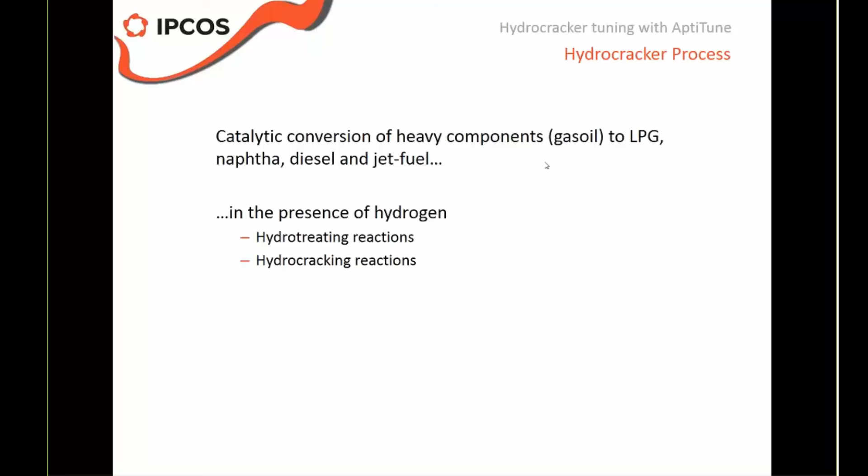So, as I promised, let's have a look first at the process itself. A hydrocracker is actually a catalytic conversion of different heavy components. Typically, the feed will be a gas oil type of feed coming from either the vacuum unit in the refinery, or could even be gas oil from the atmospheric unit. And those components will be cracked to lighter components, including LPG, naphthas, diesels, and jet fuel. And this conversion is done in the presence of hydrogen, and that means we'll have 2 types of reactions. We have hydrotreating reactions as well as hydrocracking.

Second important part is that we'll have intermediate addition of hydrogen inside my reactors. So this is where my reactant hydrogen comes from. It's not only adding hydrogen, but it also has an impact on the temperatures in my reactor. Why is that? Because all of my reactions, they are exothermic. They are very exothermic. There's a lot of heat generation, and if we don't add this cold hydrogen, we can risk runaway. So each reactor bed will add and add and add more heat. And if we don't quench with cold hydrogen, we risk losing control of our process.

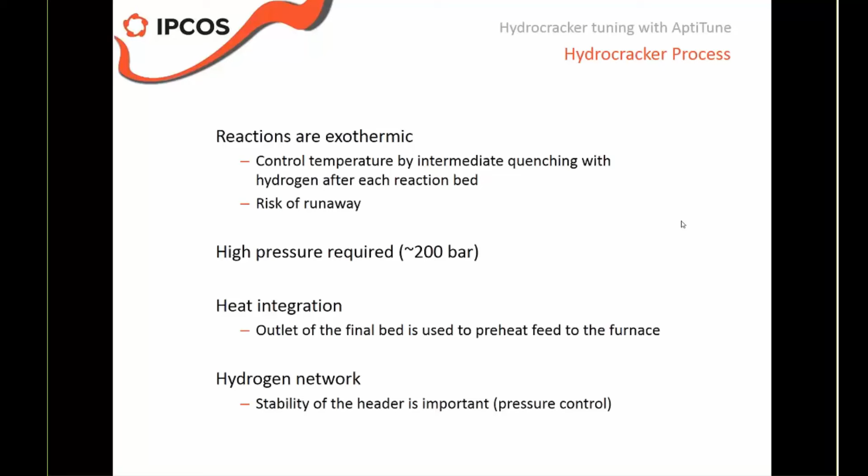So this is for the process, very briefly. Now, if you look at the challenges that we encounter, on the next slide, well, first of all, because of this runaway, it is difficult to test all the loops in open loop. This is important because for tuning, typically you will put your loop in the manual mode, you will step the outputs, and with the process response, you can calculate some tuning. Especially with AptiTune, for example, the feature-based tuning, you need this model to come up with the good tuning. But here it is difficult because we cannot put all the loops in open loop at the same time because we don't want to risk that runaway.

And second of all, there's a very important interaction between the loops. If I go back to my process slide, you see that all my temperature controls on the beds, as well as the temperature control at the outlet of the furnace, they are all in series. Okay, so each of the different temperature controllers, they will interact with each other. Because what the first controller does will be seen by the second, that one will respond to that, the third one will as well, and so on. So this is a very typical case of interaction between loops.

There's also a hidden interaction between the loops on the side of the hydrogen network, because typically all the quench flows, they come from the same network. So also there, some interaction is possible. Imagine you increase the flow on one of the quenches, then you'll see the pressure on the header will drop, and all the other flows will see that and will typically be reduced if they are not controlled.

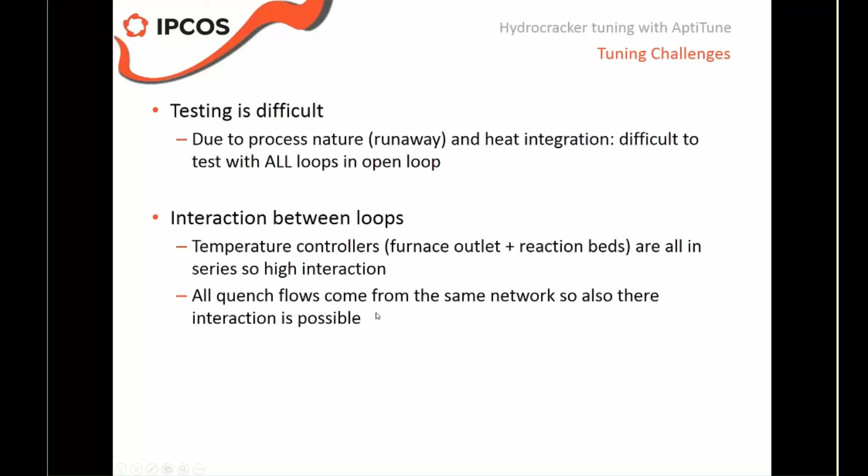Third challenge we see is that instrumentation can be limiting as well. Two things to mention here. First of all, if we could build a cascade from temperature controller to hydrogen flow to the flow valve, that's typically beneficial. I'll explain why. But that's not always possible.

It could be that safety policy or a HAZOP has indicated that you need redundant measurements for hydrogen, because imagine the hydrogen measurement going to the maximum or to the minimum because of an input open alarm. Definitely possible. Your controls will respond to that, and you risk just cutting all the hydrogen or adding too much, and you risk either runaway or just killing all the reactions. So that could be one reason why that is not possible, and then you have to just build a temperature controller to the hydrogen valve.

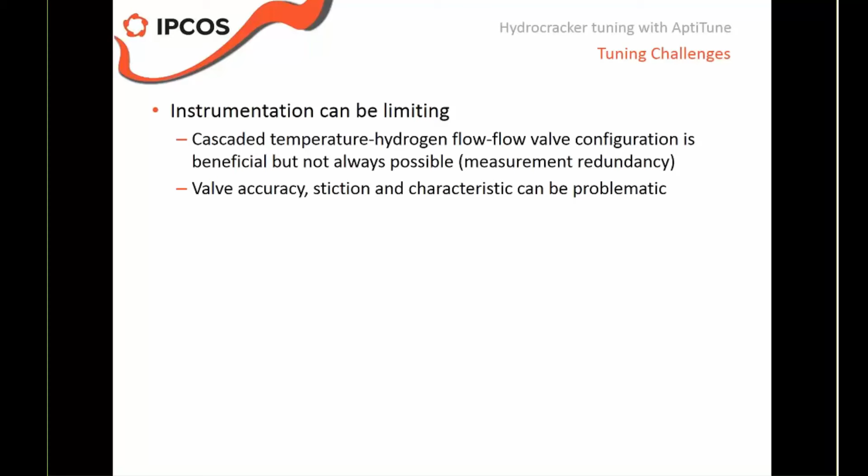The second issue with instrumentation can be the valve accuracy. Let's say, for example, if your maximum accuracy is 1%, then you can never tune better than that 1% flow, or the flow that corresponds to this 1%. You can encounter some stiction, which will also make it hard for your tuning, and also the valve characteristic can be problematic. On the next slide, I have shown two examples.

It will start and steer back my valve position. Again, I have to accumulate a lot of moves, and again when I go over a certain threshold, which corresponds to my valve stiction, the hydrogen flow falls back and I'm now back at the beginning. So a typical hysteresis case of valve stiction. This will make my life difficult for tuning.

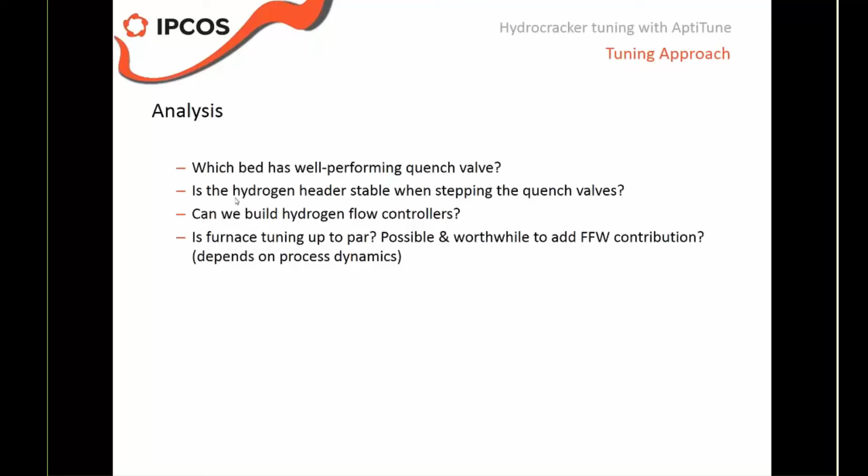Okay, when we then look at the tuning itself, the tuning effort that the engineer needs to put in: I already mentioned that it's difficult to open loop test. It's not impossible, but typically operators will not be very comfortable with it. And it's also not something that IPCOS would typically recommend, just because of the safety issues that have been touched on before.

So that means my full open loop model matrix, so the full matrix from first bed to all the temperatures, second bed to all the temperatures, even furnace, all those models cannot be found easily because I will not always have everything in open loop. The implication of this is that one of the main features of AptiTune, multiple input, multiple output tuning, cannot be used readily because I don't have the full model.

So in this case, as the control engineer, I have to manually deal with these interactions, and I have to always keep this in the back of my mind when I'm tuning. So this is something that I have to account for myself when I'm tuning in AptiTune. And this is what the demo will try to show later in the presentation.

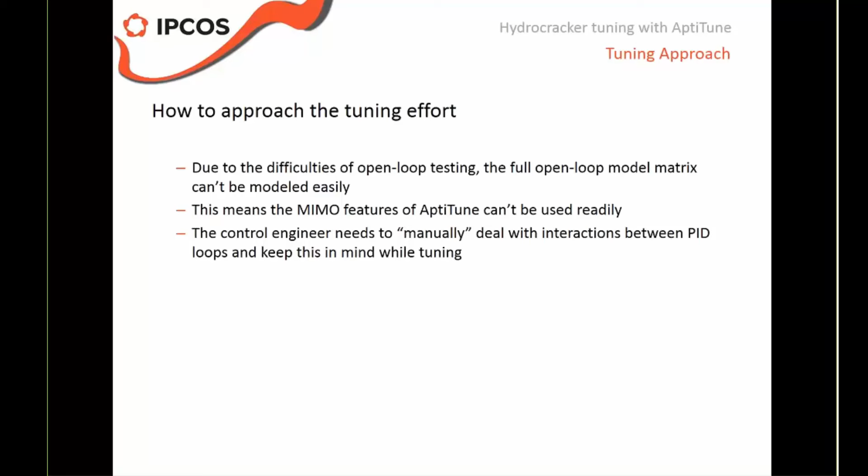Okay, if we then focus a bit more on how we do it sequentially. I already talked about first making sure my hydrogen network is working properly. And here, because there are different configurations, hydrogen from offsite, maybe I don't have full control over my header. Maybe I do, then I can tune it as well as I can. So this is an effort that should be done before, but that's a bit outside the scope of what we're trying to achieve today.

So when we're looking just at the scope of furnace and reactor, we first start with the furnace. And here, let's say we just go through the normal tuning procedure. We put the furnace in open loop and we test it by applying moves to the fuel gas flow or fuel gas valve, if that is the configuration. When I try to tune it, it's typically beneficial to use the inlet temperature as a disturbance variable.

Because then I can more easily find the nice model between fuel gas and temperature and remove all the interaction that is there with the inlet temperature of the furnace, which might be disturbed by my reactor tuning at the moment, or even feed changes. This is what allows me to account for those disturbances and allows me to actually tune them with a good model for fuel gas.

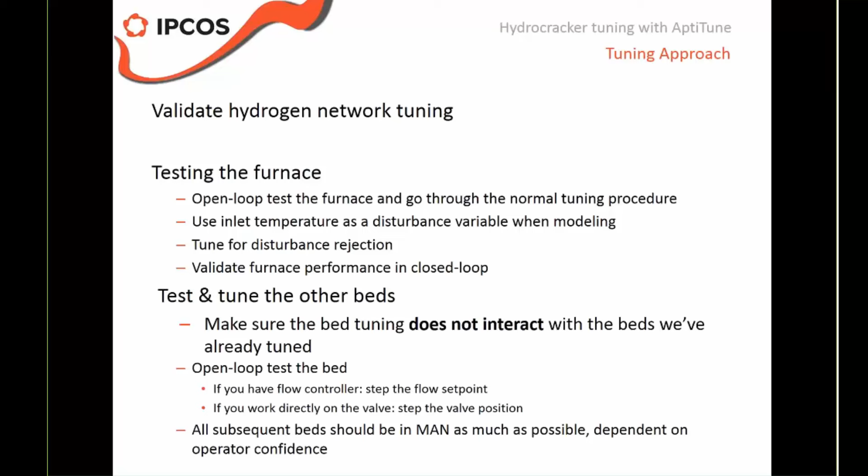Okay, now once I've done my open loop testing, I've made a number of steps that allow me to see a good response. I'm confident that the response I've seen is representative, because sometimes when you have stiction on the valves, you may do a 2% move on the valve and see nothing, and do an additional percent, and then see the full effect of the 3% move I made. If I see this, then I should repeat my steps a couple of times with that 3% to find the correct model gain and continue with this.

Now, this best performing quench valve, here I will try to tune it as fast as possible, tune that temperature as good as I can, obviously within the robustness constraints. So I look at typical load disturbances, I look at my noise sensitivity. For example, if my temperature is rather noisy, I can say for this given amount of noise, I only want my output valve to move by 0.5%. So this is the kind of constraints you'll apply to AptiTune.

And then from the results, I take a mental note, or I take a log in AptiTune of the controller dynamics that I wind up with. So why is this important? This is important when we move to the next bed. Now, why do we try to tune this bed as fast as possible? Because this is the bed that will act as sort of a hinge. It will be that bed that is able to decouple the interactions between the different beds.

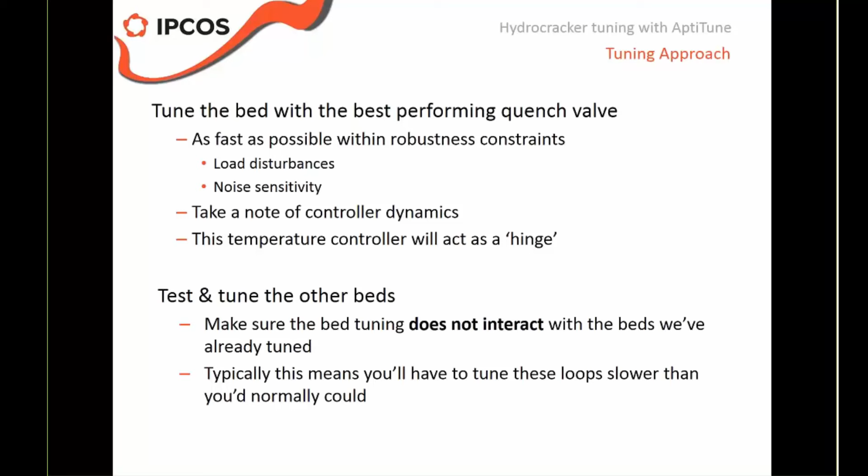Another important note here, again, I repeat, is that we haven't been able to use the full MIMO functionality, so we haven't been able to take into account all the interactions. We may have been able to see some, as I will demonstrate in the demo, but we haven't seen all of them. So that means when we go to the DCS and we apply these parameters that we've calculated, and we've already taken the step of trying to manually make sure that they don't interact, it might be necessary to then do some manual fine-tuning of certain loops.

Okay, on that note, let us move to AptiTune. So I will stop the presentation here momentarily and then move to the AptiTune screen. So what I've done here, I prepared some tuning cases. For the scope of this presentation, I've just started with some simple models. So I've skipped the modeling step. I'm confident that everyone knows how to test and tune. So for each bed, I just have a simple bed with a simple model. So if I increase my hydrogen, my temperature will come down. And I've configured some different gains and some different dead times.

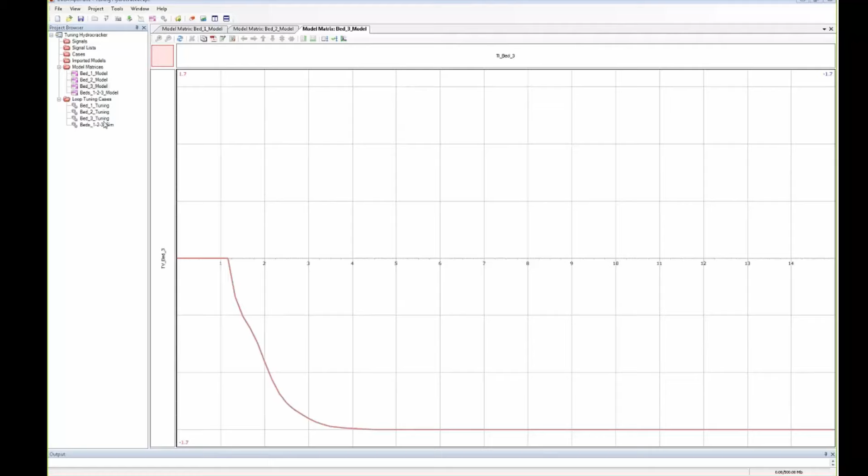And when I move to the tuning of each bed, let us take, for example, the first bed. I don't impose any additional constraints. I'm just interested in what AptiTune will come up with. So I give it a go. I see that my parameters have converged. And when I look at the disturbance rejection, which is what I'm interested in, this first bed is rather fast, and you see, if I zoom in a little bit, that within 8 minutes my disturbance will be rejected. And there's a small but limited overshoot when I come back, so temperature dips about half a degree and then goes up by only 0.06 before it lines out again. So very decent tuning, very fast. And okay, if this is my well-performing bed, then this looks okay.

I've just used the default parameters. So default gain margin, default dead time margin, which means my controller will still be robust, even if my gain is off by a factor of 3, and my dead time is also off by a factor of 2. In that edge case, I will still have obviously an underperforming but still a stable controller. Now, if I were to do this for the second bed, I've also tuned here. So I've done the same thing. I haven't applied any additional constraints. And third bed, again, no additional constraints applied.

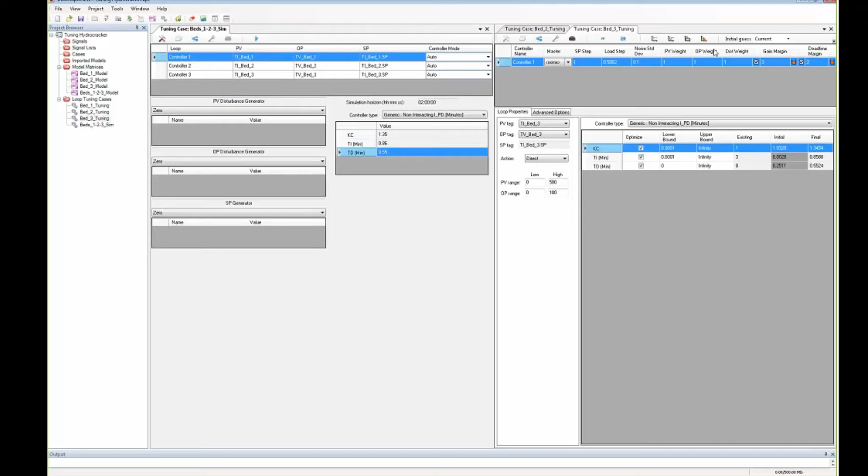And for my third controller, I do the same. I can put this over here, so I still have my overview. For the third bed, I find again a fast tuning. Gain is 1.35 in this case. It's a bit faster again, 0.86. And my derivative time might be 0.55. Okay, when I now go and simulate this case, I press the play.

And I will do some housekeeping with the curves that I don't need. I haven't applied any measurement disturbances, so I can remove those. What I can see here now is on the top curve the response of my first temperature, the third curve is my second temperature, and the fifth curve is my third bed. So with the tuning I found, on first sight it actually looks pretty good. Each disturbance is taken care of pretty fast.

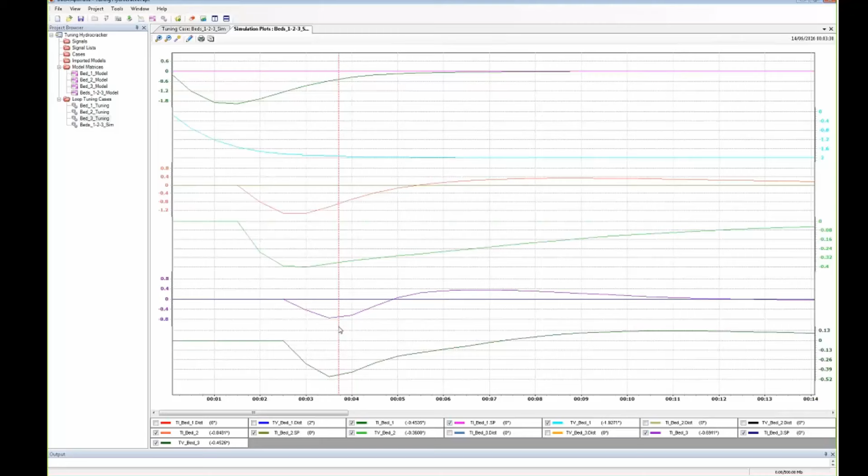But if I look at it a bit closer, I see that my third bed doesn't look too bad, but actually it's very fast. I zoom in a bit on this disturbance, so I'm still looking at this fifth curve, this purple curve. This first bit is just the inlet temperature that is disturbed, so that's something I cannot help. But then my tuning will actually reject this disturbance in about 5 minutes. That's pretty fast. It starts controlling around the 4-minute mark, and around the 10-minute mark, so about 6 minutes, I've already rejected my disturbance.

But my first controller has exactly these kind of dynamics. It's also rejecting disturbances in about 6 minutes. That means that obviously the curve I get at the outlet here will be amplified by my first controller, because it will be too fast; it will try to reject it, but the disturbance itself is in the same range of dynamics and it will actually make it worse. So you can't fully reject the disturbance in the first bed, and you still propagate towards the other beds.

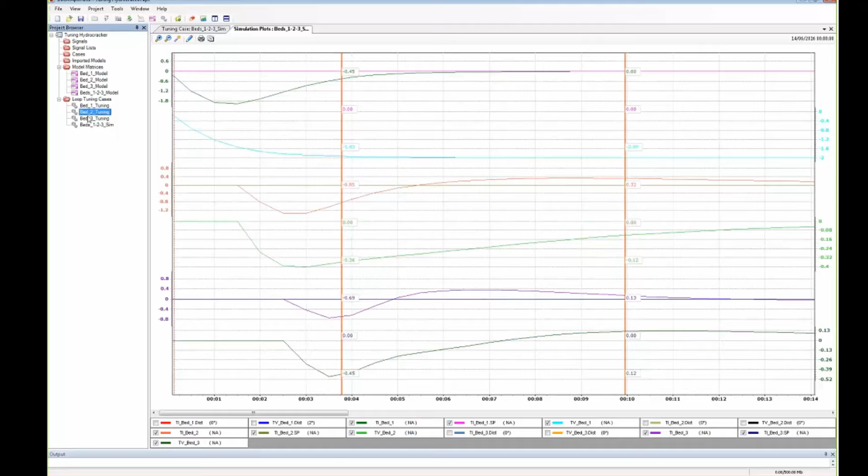I'm looking at the time and I see that we're running a bit low. So I will just briefly show what you can do in AptiTune to make one of the loops a bit slower. This can be done, for example, when I look at disturbance rejection, I can impose a minimum return time. So instead of this 10 minutes, I might say it needs to be 15 or 20. So it needs to be slower than the fastest loop I've tuned.

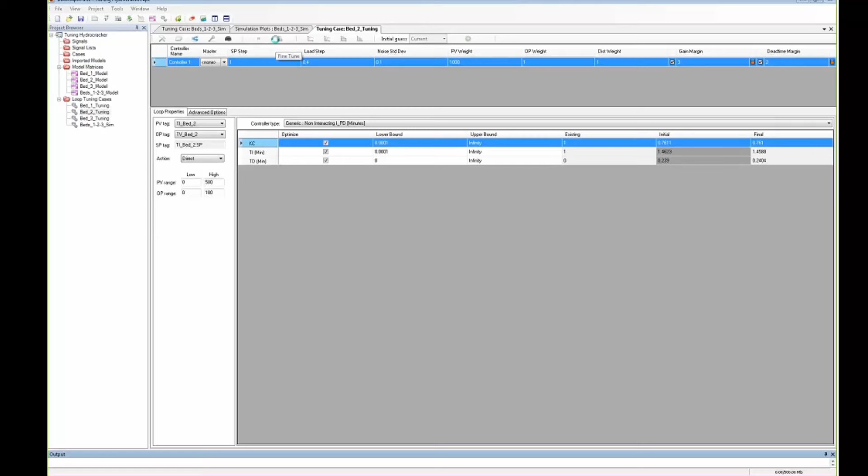And so when I enable these settings, and I tune again for them, and I wait until my solution is converged, if I now look at my new settings, then I see instead of those 6 minutes or 8 minutes I had before, now my disturbance is actually rejected a lot slower. So instead of those disturbances that will now come back to my first loop as a feedback, instead of having those dynamics between the 6 to 8 minute mark, it will be slower, it will be more 12, 15, 20 minutes. And if I do this for each bed, then whatever I do, the first bed will never see those disturbances that it cannot handle, and will be able to be a lot closer to my set point.

So this is one way to still leverage all the functionality of AptiTune. So the SISO tuning, but then still using the models I have for a simulation and using that information to fine-tune my results by imposing an additional constraint or forcing it to be a bit more relaxed about rejecting a disturbance. Okay, so this was very briefly what we have in AptiTune. Let me now return to my presentation.

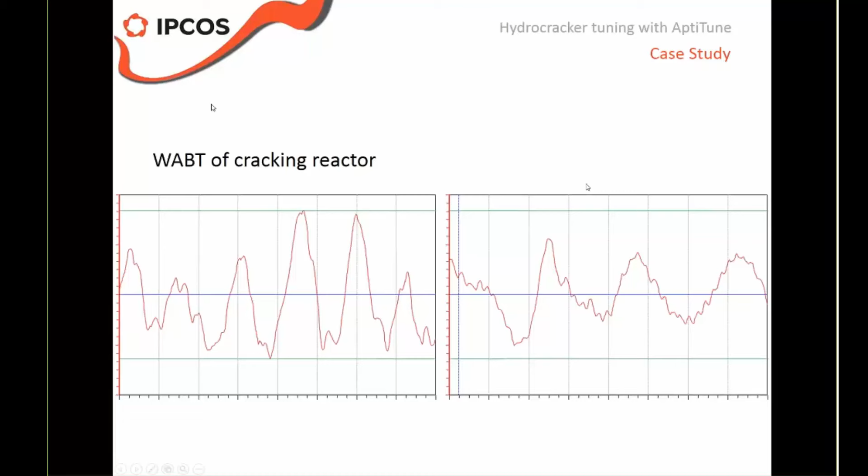And what's also interesting is that the period of disturbance or oscillation has been reduced from about 6 peaks or 6 full periods you see here to about 3 to 3.5 on the right hand side, which gives the fractionation unit that comes afterwards a lot more time to handle these disturbances and reject them accordingly and not vent any recuperated hydrogen, not lose quality control, and so on. So this is just a very brief showing of what kind of result this can lead to.

So concluding, we said that tuning is difficult for a number of different reasons. By firmly analyzing the process and using a structured approach, we can actually leverage the performance of each bed to tune them with AptiTune accordingly. And there is some control engineer judgment required to optimally tune these interactions because we're not able to use the MIMO functionality. And the results show that even for underperforming instrumentation, with the proper tuning, you can actually stabilize your reactors and have a better performance on both KPIs on the reactor as well as the performance of loops in the fractionation units.

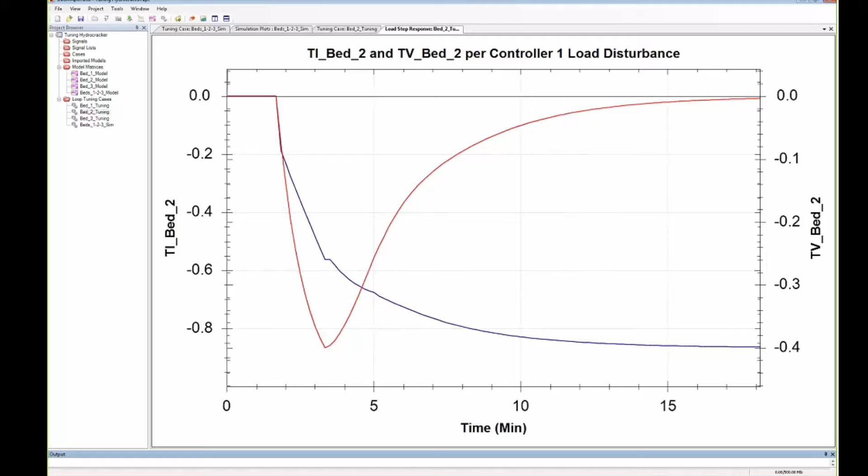So these kind of models, well, first of all, the diagonal is easy because these are the models that you find when you just SISO, let's say, step one bed at a time. You'll just see a response from your hydrogen flow or your hydrogen valve to the bed. So that is an easy one, and typically that response is rather quick because you do it very locally.

Now in this case I was lucky that, after some SISO testing, we were able to build some confidence. We saw that the process gains were a bit smaller than we maybe expected at the beginning. So we were able to test one reactor completely in open loop, so 3 loops in manual at the same time.

And what you then get is when I step my first bed, I still have this fast response to the first bed, but now I also have the secondary slow response to my second bed, because that one is now also in manual, it's not controlling. So I have an impact there. And then thirdly, I also have one to the third bed. So each time my model gain and process dynamics as well as the dead time will be different. But because I had all of them in manual, I do see this response.

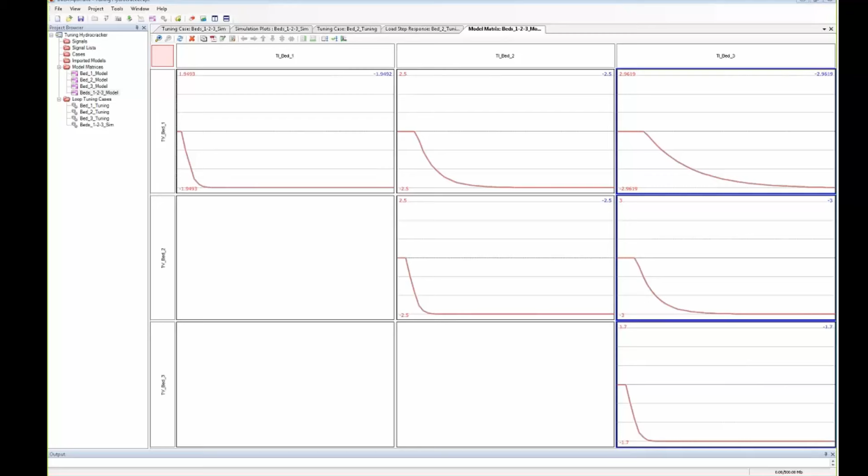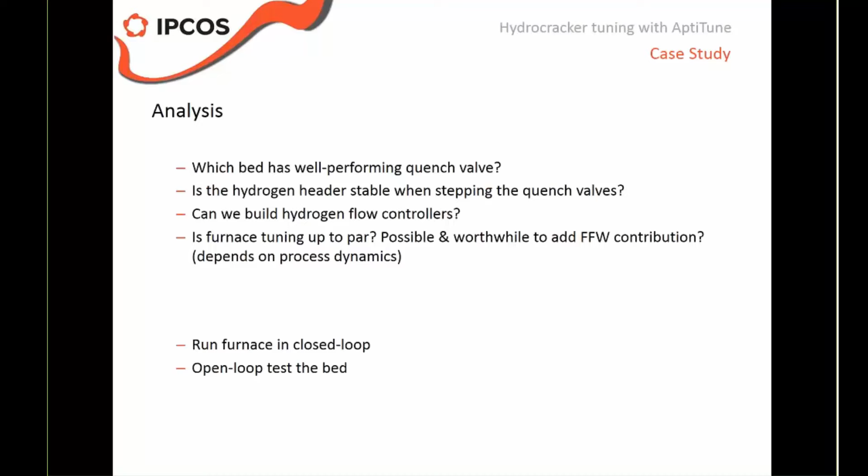Okay. Another question: what if the best performance quench valve is the one of my last bed? Right. So that would mean indeed that you have that final bed. Let me just show the process flow diagram for ease of explanation. I go back to my presentation, all the way back to the process flow diagram. So let's say that indeed the bed I have with the best performance is my last bed.

Ideally, obviously, I would prefer it maybe around the first or second bed, because then I can just reject the remaining disturbances that the furnace has. But if it's the last bed, it's not that bad. I will still try to tune it as fast as possible.

What I have to keep in mind though is that maybe my first bed of the second reactor or my second bed of the second reactor has a very bad performance. So maybe the disturbances I see on my third bed are really big. So I have to make sure that I don't tune it overly fast, because I would be chasing my own tail then, and I wouldn't be able to reject everything. But say this is not the case, then it's actually not a problem. Then I just tune it as good as possible.

That would mean actually that the disturbances going to the inlet of the furnace will be minimal. So I will have a rather constant inlet temperature, and that means it's easier for me to tune the furnace and keep the inlets of my reactor stable. So that's one way of looking at it, saying, okay, maybe it's the last bed, but because I have kind of a circular loop, it doesn't actually matter where I start.

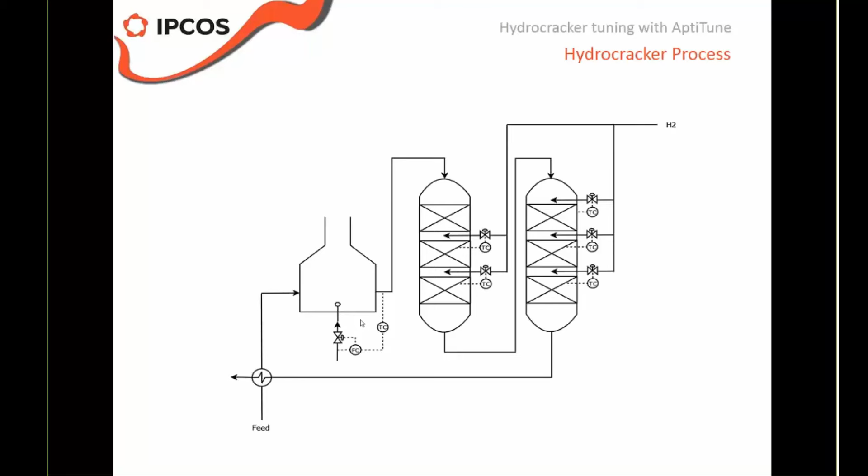The thing to keep in mind is that you obviously add some additional complexity that you might want to avoid in the beginning when you're tuning, and when you're happy with tuning, you can additionally add this kind of linearization.